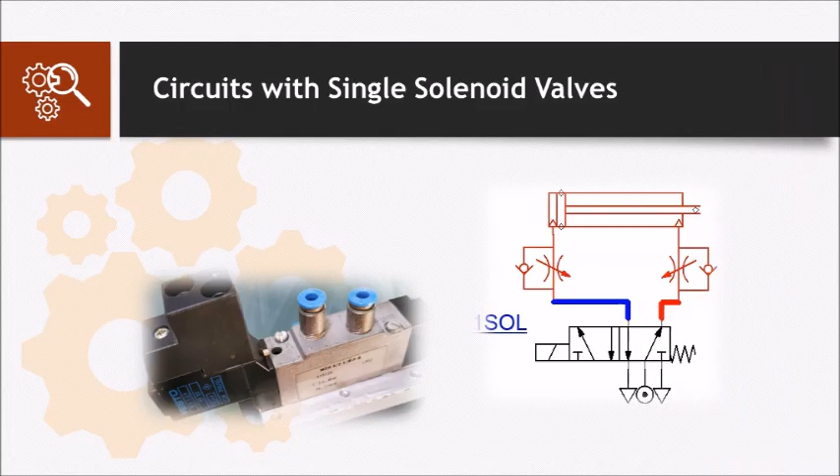Now we are at the last section of worksheet 4, whereby we will learn about circuits with single solenoid valve. As you can see, this is the directional control valve. It only has one solenoid, so this is a single solenoid valve.

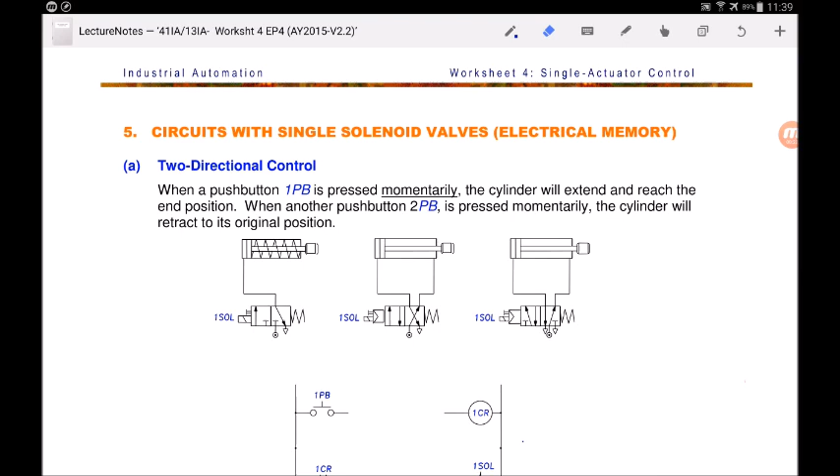We learned earlier that single solenoid valve have electrical memory, unlike a double solenoid valve which has pneumatic memory. So let's first go through what we mean by electrical memory. Electrical memory is actually a circuit using single solenoid spring return valve, and it needs to have its electrical signal stored there, hence it is said to have electrical memory.

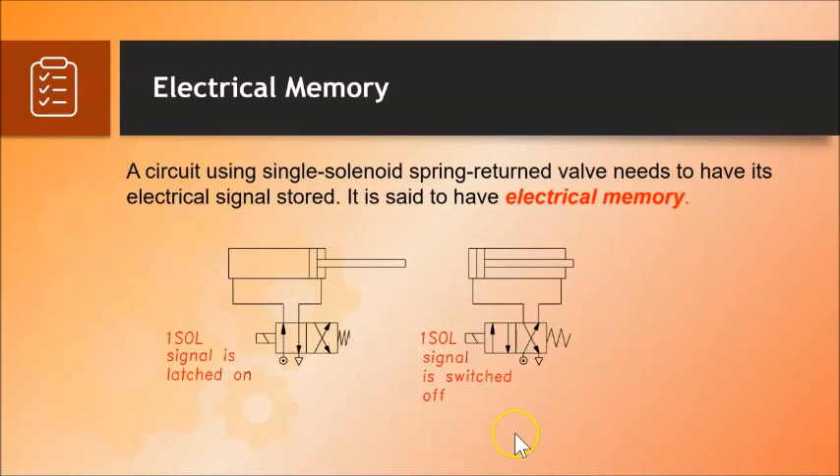What does it mean? Basically, in order to make this cylinder extend, I need to constantly energize this solenoid. The keyword here is constantly turn on this solenoid. The moment you switch off the signal at the first solenoid, it will go back to its spring position and make the cylinder retract, as you can trace the airflow path here. So single solenoid directional control valve is said to have electrical memory because it doesn't remember its last position. Hence, you need to constantly turn on the solenoid in order to make it extend in this example.

Now we shall take a look at single solenoid directional control valve and how it behaves. The default position of the single solenoid directional control valve is at this position, which is the spring position. At the spring position, the air supply will go through the directional control valve to the rod side of the cylinder, and come back to the exhaust. So when it's at spring position, cylinder will retract.

So if I want to make the cylinder extend, I need to energize solenoid 1 using this control circuit so that the valve will switch to this position to make the cylinder extend. Let's visualize this control circuit first.

When I press 1 PB, 1 CR will turn on, contact will close, the solenoid will be energized and the cylinder will start to extend. Let's watch this now.

So I press and hold 1 PB, 1 CR is on, contact is closed, solenoid is energized, the cylinder is extending because it's at this position. However, the moment I release 1 PB, can you see the valve immediately switch back to this position, which is the spring position, because there's no more power to the solenoid the moment I release 1 PB. As 1 CR coil is de-energized, contact will go back to open, solenoid is off. That's why it is retracting now.

Let's watch again. When I press 1 PB, solenoid is being energized. However, the moment I release 1 PB, cylinder immediately retracts back because it goes back to spring position as the solenoid is now de-energized. It's off.

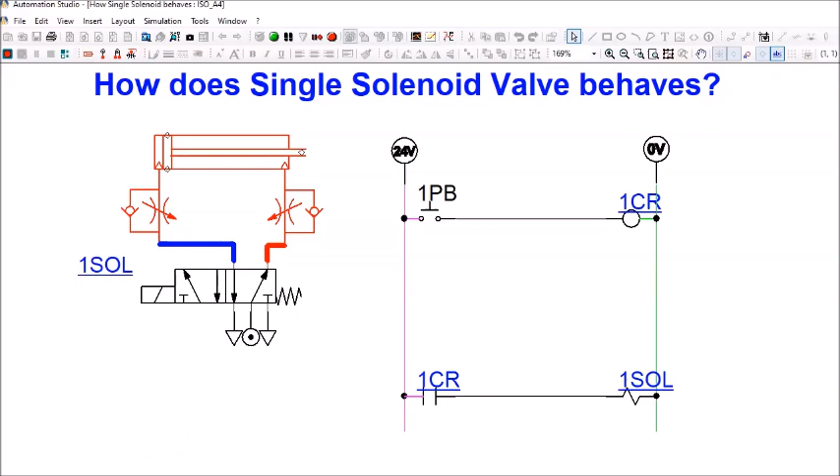So let's go back to the worksheet now to understand single solenoid directional control valve better and how we can design the circuit to control a single solenoid directional control valve efficiently.

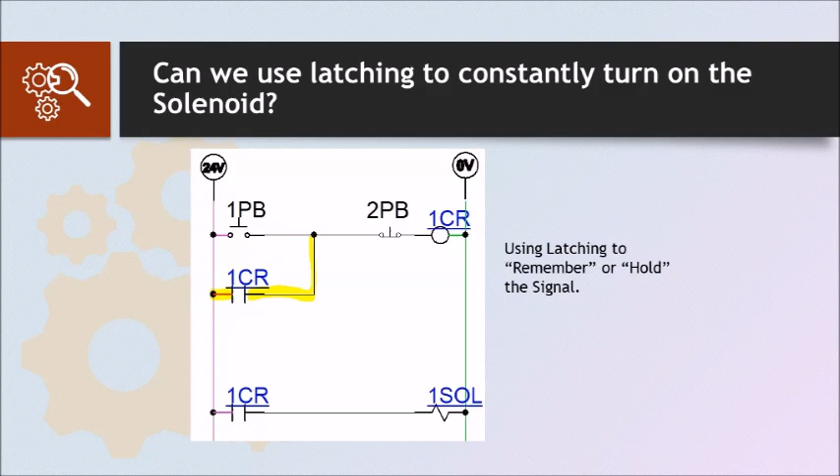Okay, as you can see earlier in the simulation diagram, if the single solenoid over here suddenly has no power, or is being de-energized, the directional control valve will immediately spring back to spring position, to make the cylinder retract. This is the key difference between a single solenoid directional control valve as compared to a double solenoid directional control valve, which have pneumatic memory.

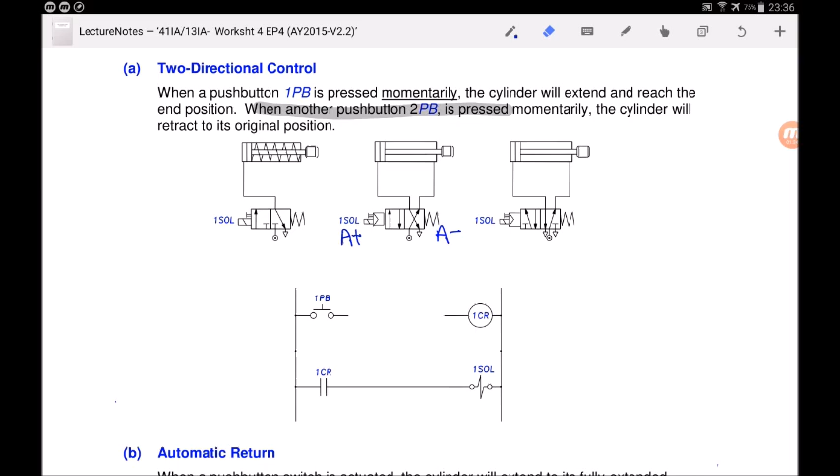So let's take a look at this question first. When push button 1 PB is being pressed momentarily, the cylinder will extend and reach the end position. When push button 2 PB is being pressed momentarily, the cylinder will retract to its original position. So let's write down the flow of this question first. When 1 PB is being pressed momentarily, this is the key word here, meaning you press and let go, the cylinder will extend and reach the end position, and stays there until you press 2 PB, then the cylinder will retract.

Just to recall again, earlier we mentioned that A means cylinder A, plus means extend. So over here there's only one cylinder, so I'm talking about A extend and A retract, cylinder A extend, cylinder A retract.

So now let's take a look at this electrical ladder diagram. First, we always look at the purpose of the control relay. As you can see over here, this 1CR control relay contact is here, and the contact of the 1CR is being used to control the solenoid. In other words, when the 1CR coil is being energized, the contact will close and the solenoid will turn on. What happens when the solenoid turns on?

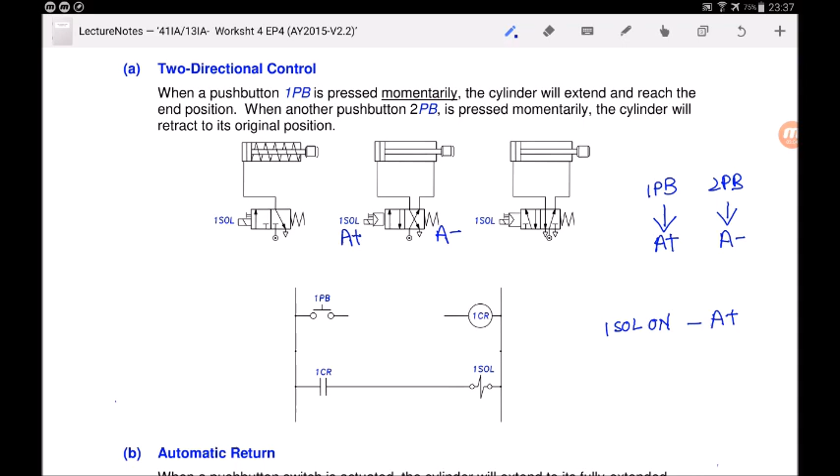As you can see over here, I already labeled the diagram. When the solenoid is energized, the cylinder will extend because the directional control valve is at this position. So it's good to write down all these to help you solve the question. I will just write here, when 1 SOL is on, the cylinder will extend. This is for my own notes, to help me solve the question. And when 1 SOL is off, you go to the spring position, the cylinder will then retract. So with this, I know that the purpose of 1CR is to make the cylinder extend and retract.

So how do you energize 1CR to turn the solenoid on? Can I just draw a straight line over here like what I have shown you earlier in the simulation circuit? The answer is no, because the question says when 1 PB is being pressed momentarily, meaning first you press, 1CR will turn on, correct? Contact will close, solenoid will be energized, the cylinder will start to extend, but the moment you let go of 1 PB, no more power to 1CR, the contact will stay open, the solenoid will be off, and the cylinder will immediately retract.

So we cannot make the cylinder extend properly. So how do we achieve continuous power to 1CR so as to close the contact over here to make the solenoid turn on when 1 PB is pressed? You have learned this before. All you need to do is create a latch. So let's look at the concept again. When you press 1 PB, the 1CR coil will turn on, the contact will close, both contacts will close, the solenoid will turn on, and because the contact over here closes, 1CR will turn on forever now, even if you let go of 1 PB.

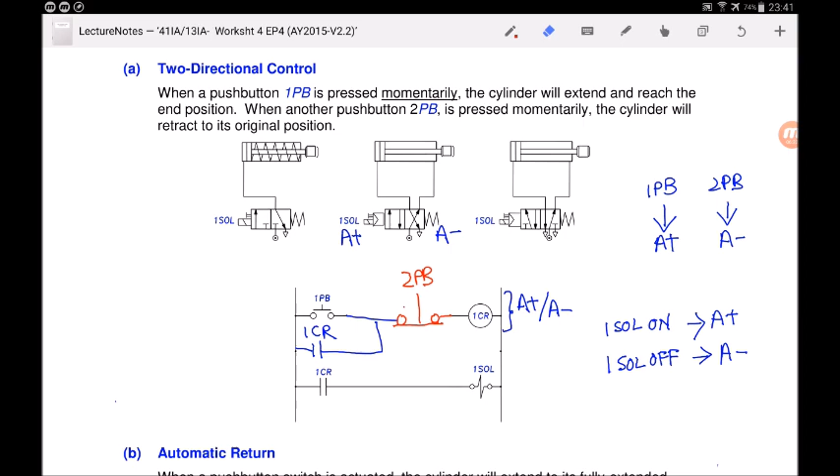Now we will look at the simulation circuit for this again. I'm going to show you how this control circuit is going to work for this single solenoid directional control valve. As you can see, the directional control valve is currently at retract position, which is at this spring position over here. So the moment I energize the solenoid, the cylinder will start to extend. We need to constantly turn on this solenoid in order to make the cylinder extend fully. So as I've explained earlier in the worksheet, we need the solenoid to be constantly powered on, and to achieve that we just need to draw a latching circuit.

So let's visualize how this latching circuit is going to work. I'm going to press 1 PB momentarily, and you can see that the control relay coil will be energized. The contact will change to close. 1 PB is pressed and let go. You can see 1 CR is turned on and is constantly powered on by the latching circuit, and the contact will close because the coil is energized. The cylinder will extend because solenoid is on. You can see that as long as you constantly power on the solenoid, the directional control valve will stay at this position and the cylinder will stay fully extended there. Because solenoid is energized, and is still being energized, the valve position is at the solenoid position, hence the cylinder stays this way.

How am I going to make this cylinder retract? The only way to make the cylinder retract is to de-energize the solenoid. That means you turn off the solenoid power and the directional control valve will go back to this spring position to make the cylinder retract. So let's watch this. When I press 2 PB, I'm going to break the circuit, which means that 1 CR will be off. When the coil of 1 CR is off, the contact will go back to open position and solenoid will be off as well. Hence, it goes back to spring position. When I press 2 PB momentarily, 1 CR is off, contact all open, solenoid is off. You can see that the cylinder starts to retract back to the retracted position.

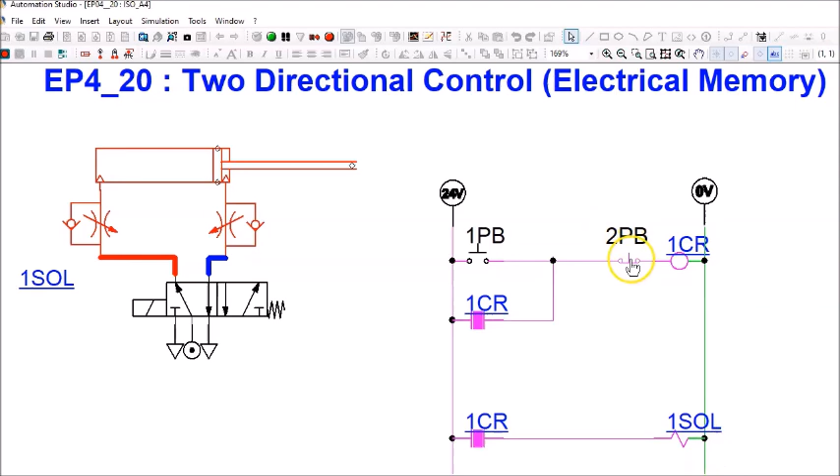So let's watch this simulation again. When I press 1 PB momentarily, solenoid is being energized, cylinder will start to extend. And once it reaches fully extended position, it will stay there, because the cylinder is fully extended and because the solenoid is still energized, it will stay in this valve position. So I'm going to break the circuit, which means that I'm going to turn off the solenoid. I'm going to press 2 PB momentarily. 1 CR is off, the contact will go back to open, the solenoid will be off, the cylinder will start to retract because it is back to the spring position, as the solenoid is off.

Okay, so now let's go back to the worksheet.

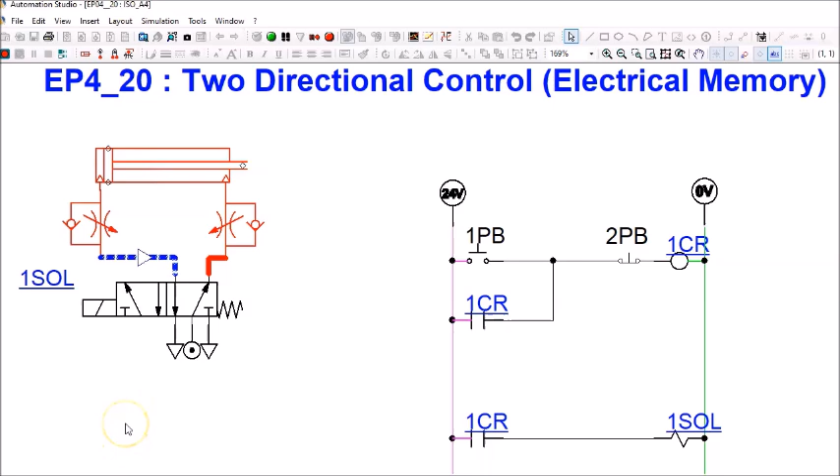Now we are back to the worksheet and we shall look at the automatic return circuit. You can see over here there are two pneumatic drive circuits. This is a single acting cylinder, this is a double acting cylinder because of 2 air ports, single acting cylinder because of only 1 air port. This one is using a 3/2-way normally closed single solenoid directional control valve. This one is using a 4/2-way single solenoid directional control valve. As you can see, both are using single solenoid directional control valve, so the control method will be identical. So what did the question want us to do? It says that when a push button is actuated, the cylinder will extend to its fully extended position and then retract automatically.

Okay, so there will only be one push button in this circuit. How do we know that the cylinder will extend to its fully extended position? The cylinder has no eyes, so how does it know that it has reached there?

Well, you can introduce a limit switch over here, which I'm drawing now, so that when the cylinder is fully extended, you will activate this limit switch to close it or open it, depending on the question. This question is the same: when the cylinder is fully extended, you will activate the limit switch.

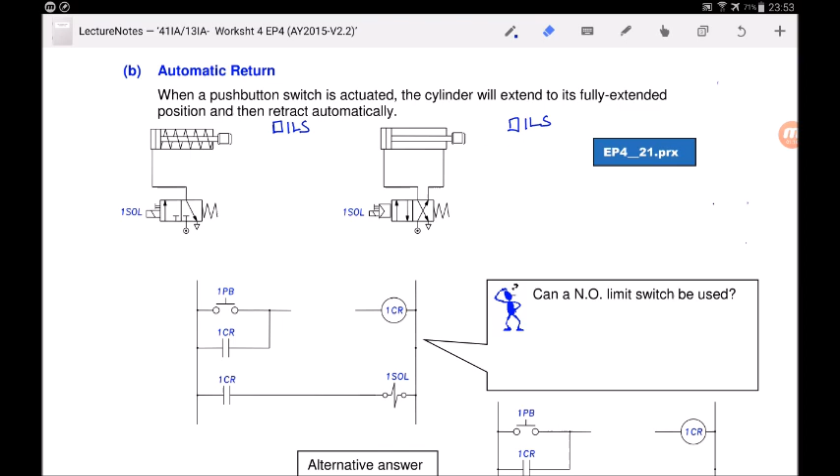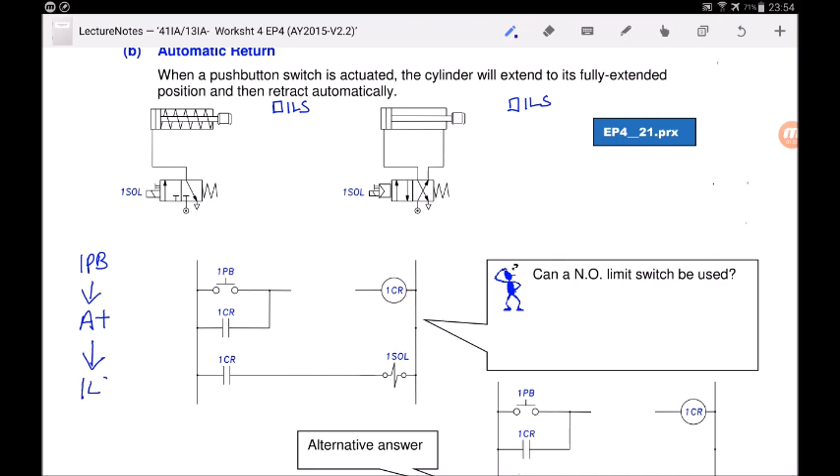So how are we going to draw the control circuit over here? Let's take a look. First, we draw the flow of the diagram. When 1 PB is actuated, the cylinder will extend. And how do I know it reached its fully extended position? 1LS, and then it will retract.

With this, let's look at this circuit diagram first. First we must find out the purpose of 1CR. As you can see, 1CR is used to control the solenoid, so the purpose is to make the cylinder extend and retract.

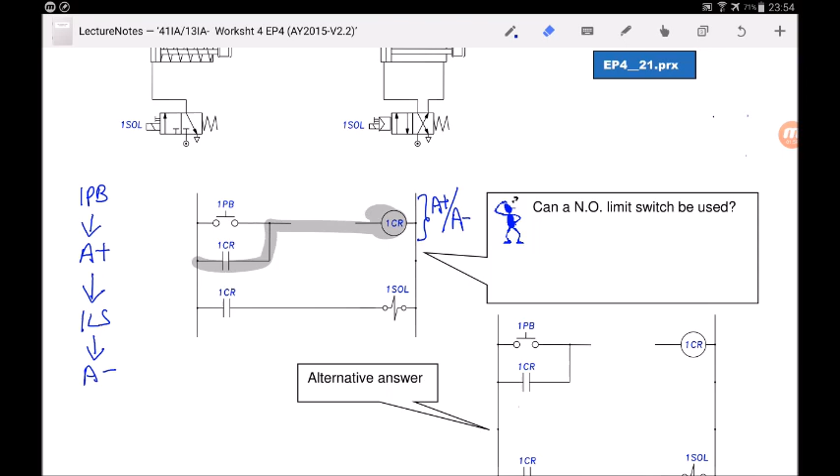So how do you make the cylinder extend? Well, when you press 1 PB, 1CR will turn on, and this latch will continuously power on the control relay, correct? And the solenoid will be energized and the cylinder will extend.

So when do you want to turn off the power to 1CR so that the solenoid will have no more power and the cylinder will retract? Well, I just need to draw the limit switch here. So take a look at this limit switch now first.

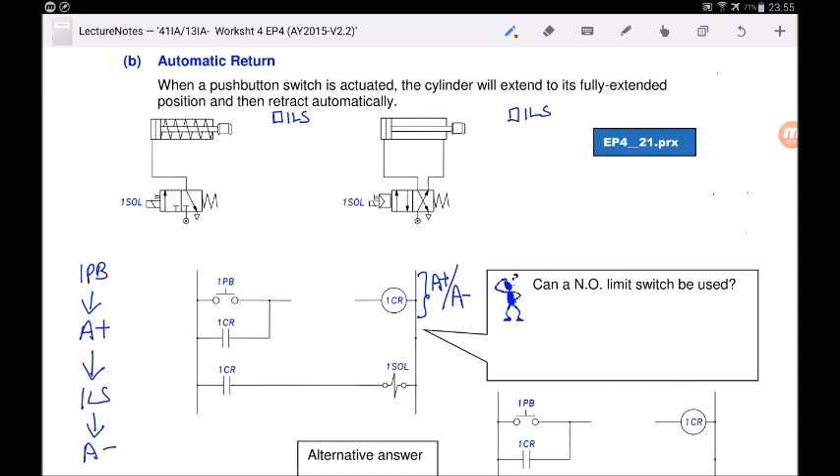Is this limit switch activated in the initial diagram? No, it's not. So I can either draw normally open or normally close. There are two answers I can draw: normally open or normally close. So which one should I put in here?

Let's try the normally open first. Do you think this will work? No, it will not work.

Why? When you press 1 PB, you can't even turn on 1CR because your limit switch is normally open, and it will not be activated until your cylinder is fully extended. But because you are not providing any power to your solenoid, your cylinder will never extend. So this is wrong.

So I need to draw normally close. Okay, let's take a look. When you press 1 PB, and because the limit switch is normally closed at the start, 1CR will turn on, the solenoid will be on because the contact will close, and the cylinder will extend.

However, when the cylinder is fully extended, 1LS normally closed will become held open. It will break the circuit, 1CR will be off, the 1CR contact will go back to its original position, which is normally open, the solenoid will be off, and the cylinder will immediately retract. So this is how we do this question.

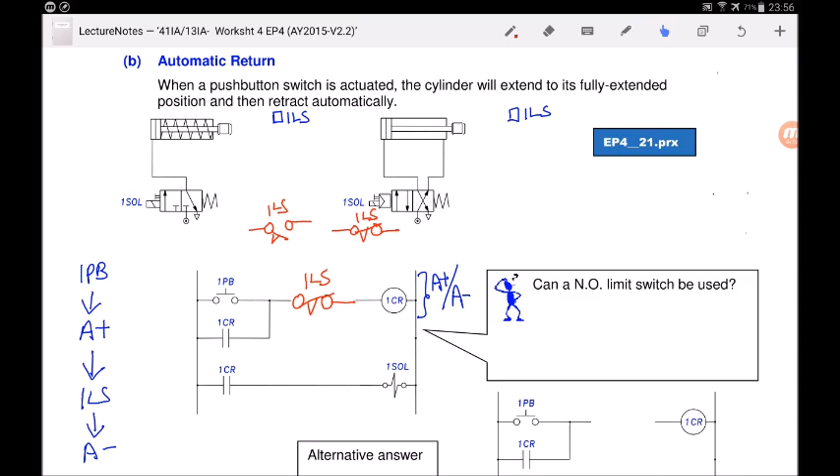Next, the question asks, can we use a normally open limit switch? Well, I know that I cannot use it directly in here, which I explained to you just now. But can I think of a way just to use this normally open limit switch?

Yes, I can. So to use this normally open limit switch, I cannot draw it here, because if I press 1 PB, your 1CR will never turn on, your solenoid will never be on, your cylinder will never extend. If it never extends, the circuit already failed, because when you press 1 PB, the cylinder must extend.

So if I cannot draw it here, I have to draw it as an input, which is on the left, right? So I draw 1LS normally open here first, because the question asked me to use it. I have to think of a way to use it. And I may want to create a control relay.

So I'll create another control relay, I call it 2CR. The purpose of 2CR is to know that the cylinder is fully extended, no, that the cylinder is fully extended.

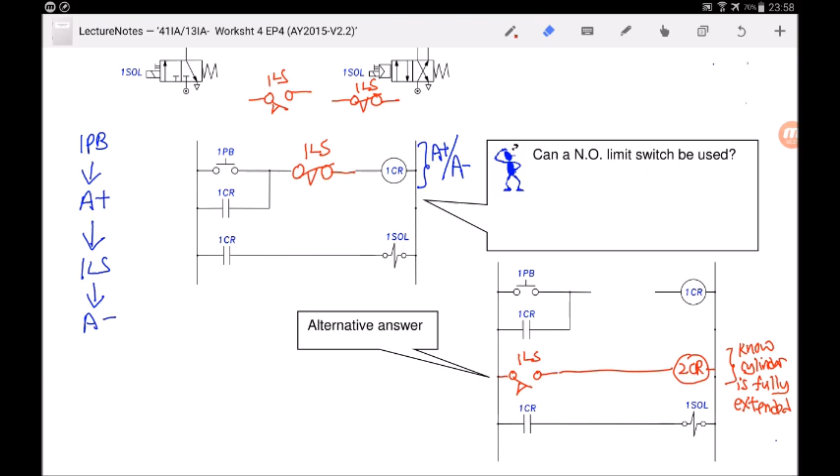Let's think about this first. Look at the circuit on top here. First this pneumatic drive circuit, or this circuit also can. If your limit switch is at its original position, it is normally open, which I draw over here, right? Normally open.

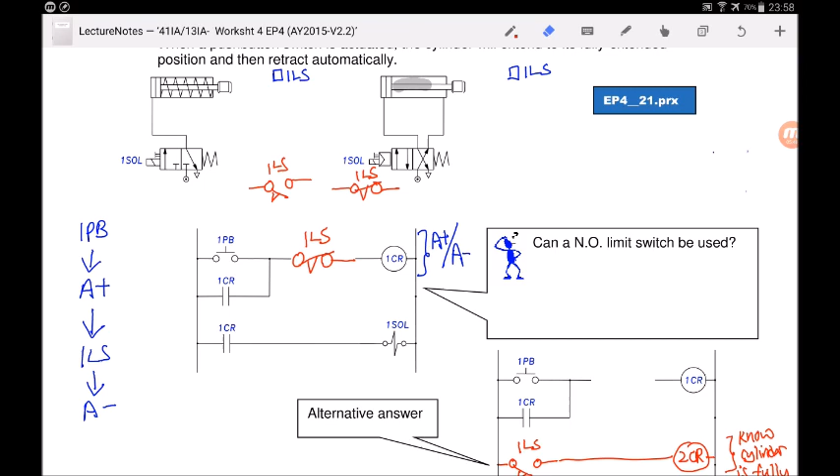When will a limit switch be activated? When your cylinder is fully extended, you will activate this limit switch, which makes it normally open held close. 2CR will turn on, and you know that your cylinder is now fully extended. Can I make use of the contact of 2CR to insert in here?

Okay, so there are two types of contact for control relay. It's either normally open or normally closed. Okay, so let's try the normally closed this time, and let's see whether I will get the answer.

Okay, so you can see that I choose normally closed because I want to allow current to pass through. When you press 1 PB, current can go through, 1 CR will turn on, solenoid will be energized, and your cylinder will extend. Your cylinder will slowly extend until you reach 1 LS.

It will become normally open, held closed. 2 CR will turn on because now you know that 2 CR turning on means your cylinder is fully extended. When 2 CR turns on, the normally closed contact becomes open, right? It will change, and no more power to the 1 CR coil.

Contact will become open again. No more power to solenoid. The cylinder will immediately retract.

Okay, so you can see there are two answers to this question. This is solution 1 over here. Solution 1 is here, and this is solution 2. And to complete this, I also want to label what's the purpose of 1 CR, which is to energize the solenoid to make the cylinder extend and retract.

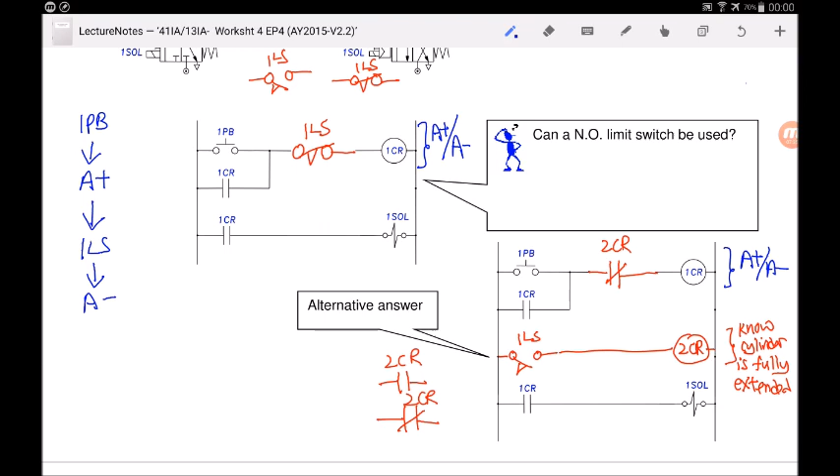With this, let's take a look at the simulation circuit to understand this better. We will now take a look at this simulation circuit where this cylinder, once it reaches the fully extended position, will then automatically return back to the retracted position. So how are we going to design a control circuit to achieve that?

Well, let's take a look at this circuit, which I have explained to you earlier in the worksheet. So this 1LS again is not activated. We are using a normally closed 1LS in this scenario first. So as you can visualize, when 1 PB is pressed, the solenoid will be energized, the cylinder will start to extend because the valve is at this position.

And when it reaches 1 LS, it will activate the switch, and this normally closed will become held open, and it will immediately break this circuit, which means that 1 CR will be off, and the solenoid will be de-energized, which means off as well. So the cylinder will go back to retracted position because the directional control valve will be at this spring position.

So let's watch this. When I press 1 PB momentarily, you can see that the solenoid will be energized. The cylinder will slowly extend, and once it is fully extended, it will activate 1 LS. Look at this, normally closed, held open, breaks the circuit, and the solenoid will be off.

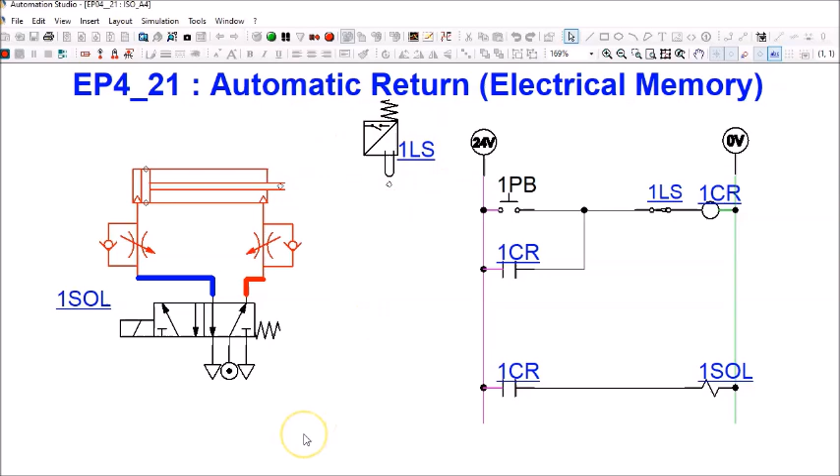Okay, let's watch the next simulation circuit. Now we'll take a look at this control circuit where we are using this normally open limit switch with an additional control relay, coil and contact.

Okay, so when I press 1 PB, the cylinder will extend because the solenoid will be energized. When it reaches the fully extended position at 1 LS, you can see that it will become normally open, held closed because it's activated.

Hence, 2CR coil will be energized, the contact will change to open, which means no more power to 1CR, which in turn means your 1 SOL will be off and your cylinder will go back to retracted position because the directional control valve will be back to spring position whenever the solenoid is off.

Okay, so let's watch this. When I press 1 PB momentarily, 1CR coil is energized because of this latching circuit, and you can see the solenoid is on. The moment the cylinder reaches fully extended position at 1 LS, it will become normally open, held, close. 2CR coil will be energized, contact will open, and you can see 1CR is off now.

Solenoid is off, the cylinder will start to retract. The moment you leave 1 LS, it goes back to open position, which means 2CR coil is not energized anymore. That's why the contact will go back to close. Hence, if I press 1 PB again, the cylinder will extend.

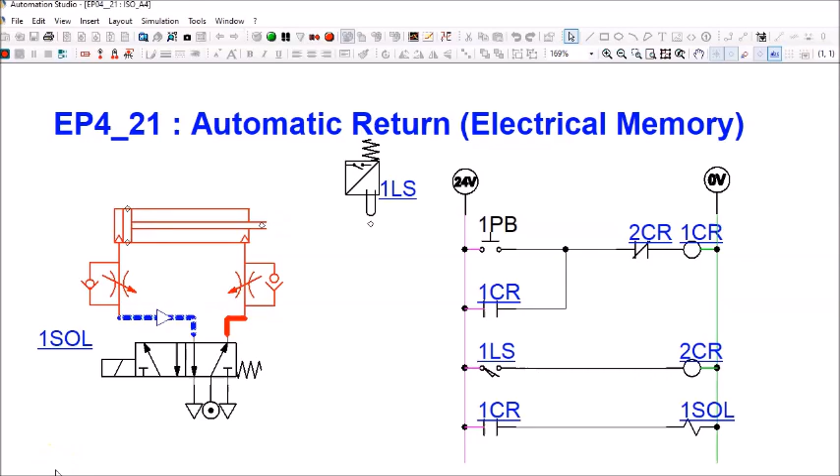We are now back to the worksheet again, and we will take a look at the third circuit for single solenoid directional control valve, which is the time delay control. So when push button 1 PB is activated, the cylinder will extend. Upon reaching its fully extended position at 1 LS, the cylinder will remain there for a few seconds before retracting to its initial position.

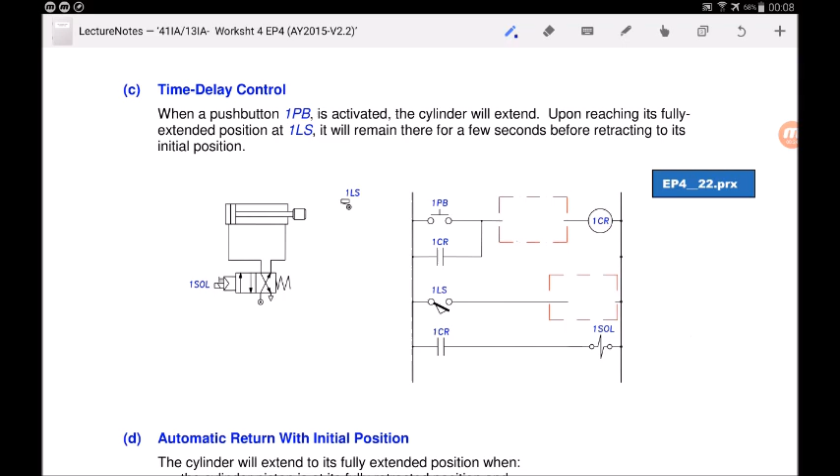Okay, so let's write down the flow of this question first. When 1 PB is activated, the cylinder will extend. Upon reaching its fully extended position at 1 LS, it will remain there for a few seconds - let's give it 5 seconds - before it retracts to its initial position. So retract is A minus, correct?

So as you can see, this question involves a timer because there's a timing here, so I will need a timer relay, right? So first, let's take a look at this control circuit.

Okay, write down the purpose of 1CR first. The purpose of 1CR is to control the solenoid, which means that you are making the cylinder extend and retract. As you can see, this directional control valve, when it's at spring position, which is at this check box, the cylinder will retract because it's entering from the rod side.

And likewise, this will extend when you energize the single solenoid here. The check box will be in this position, the cylinder will extend. So, the purpose of 1CR is to make the cylinder extend and retract.

So when I press 1 PB, 1CR will turn on and the latch will ensure that you have continuous power to the control relay coil. The contact will close, the solenoid will be powered on, the cylinder will extend.

So let's take a look at this control chain here. So when I press 1 PB, cylinder will extend, which we already achieved in the circuit. Now, let's take a look. When the cylinder extends and reaches fully extended position at 1 LS, it will wait there for 5 seconds. So can I say that I would like to start my timer only when it is at 1 LS?

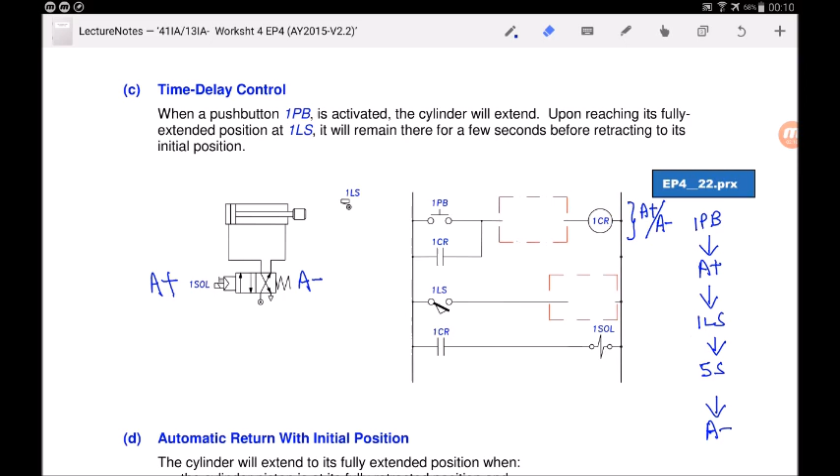Yes, okay, so we should draw the timer as a timer relay coil, in this case 5 seconds, and the contact normally open and normally close, and label please. So what should we draw over here? We should energize the coil, right? So when 1 LS is activated, normally open, held, close, you must activate the timer relay coil. So over here, I will draw the timer relay coil, and please write the preset time, 5 seconds, okay?

Okay, so 5 seconds later, you want to turn off the power to 1CR so that it will go back to normally open position and no more power to solenoid, so the cylinder will retract. So in order to turn off the power, I need to look at 1CR coil, right? So what should I put here? It's either normally open or normally close. The answer is pretty obvious. I will put normally close.

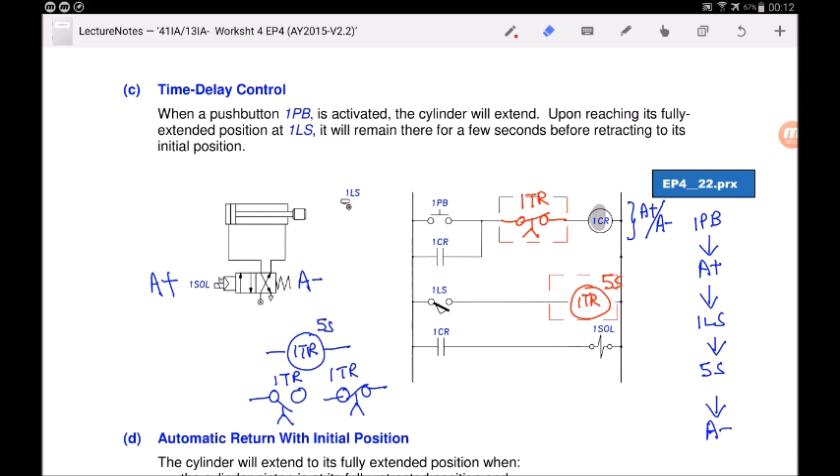Okay, let's visualize again. When you press 1PB, because your 1TR contact is normally closed, control relay coil will be energized, contact will close, the latch will close, and then solenoid will be energized forever until your cylinder reaches fully extended position at 1LS. This thing here will become normally open, held close.

You will then try to power on this timer relay coil. 5 seconds later, this timer contact will open. The moment it opens, you break the circuit and no more power to the control relay coil. The contact will become open again, and the solenoid will have no more power. The cylinder will then retract.

So as you can see over here, the flow, we have already achieved what we want, which is limit switch to turn on the timer relay coil. After that, 5 seconds later, you break the circuit which controls the cylinder extension retraction, which in this case is 1CR. That's why we put normally closed 1TR over here, so that 5 seconds later you open and the circuit will break. 1CR has no more power, so now it will be off because this contact goes back to its original normally open position. So this is how this circuit works.

So now, let's take a look at the simulation circuit for better understanding.

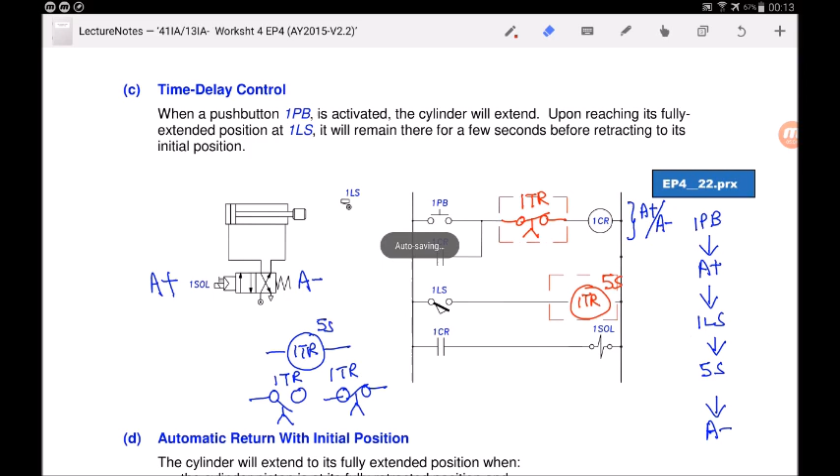Now we are looking at the simulation circuit for time delay control. So basically, when I press 1PB, 1CR will be energized, solenoid will be energized because the contact closed. The cylinder extends as the directional control valve is at this position.

And when the cylinder is at the fully extended position at 1LS, 1LS will become activated, it will become normally open, held closed. Timer relay coil will then be activated, because normally open, held closed allows current to flow through, so the coil will be energized. 5 seconds later, this normally closed contact will open, and hence the moment it opens, 1CR will have no more power.

When 1CR has no more power, it also means that your solenoid has no more power because the 1CR contact is controlling the solenoid. So the cylinder will start to retract. So let's watch this simulation circuit now.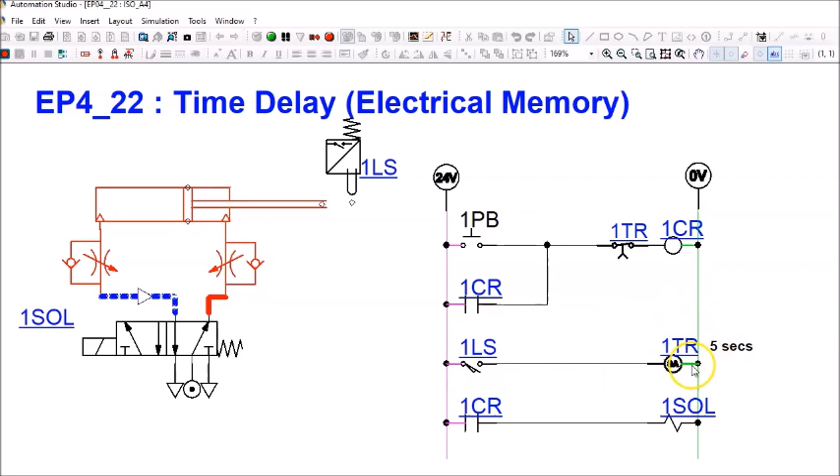And you can see that once the timer relay coil is off, timer contact will force back to original position. Same as the 1LS, the moment the cylinder piston is no longer touching it, it will become normally open again because it's not activated now. So that's the end of the simulation for time delay control.

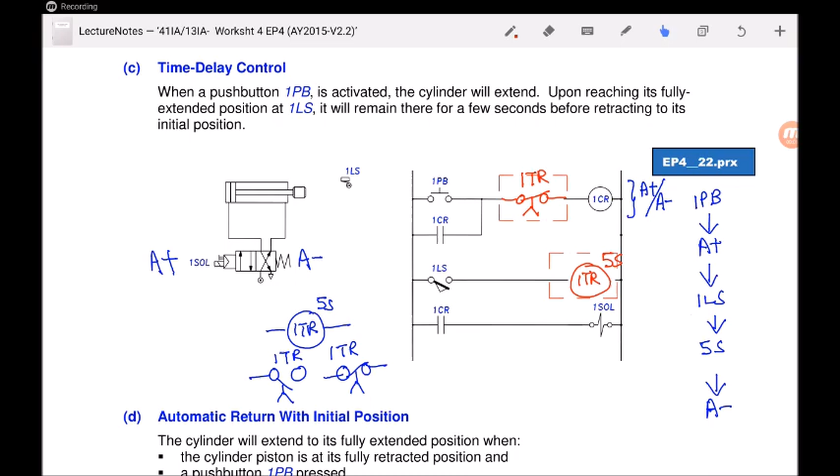We are now back at the worksheet again, and this time round we will take a look at automatic return with initial position. So the cylinder will extend to its fully extended position when two conditions are met: the cylinder piston is at its fully retracted position and a push button is being pressed. So let's write the flow first.

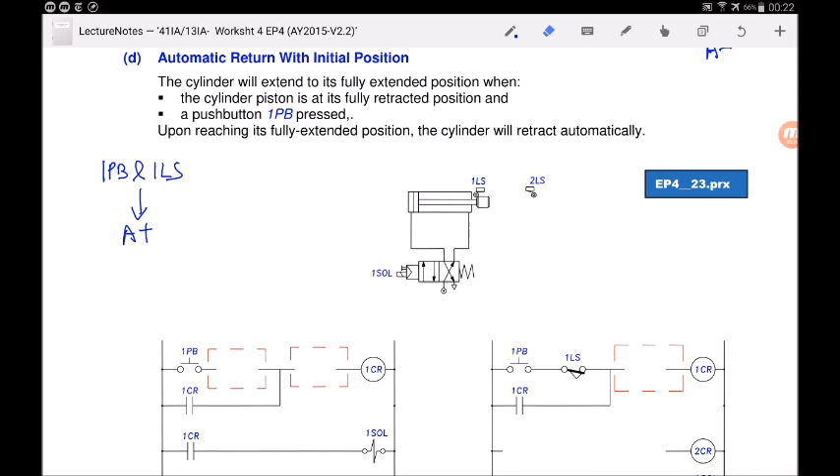So when 1PB is being pressed and the cylinder is at fully retracted position, which is 1LS, as I can see from this pneumatic drive circuit, fully retracted position, the cylinder will extend. Then it says, upon reaching its fully extended position, the cylinder will retract automatically. So, upon reaching its fully extended position at 2LS, the cylinder will retract automatically. So this is what the circuit wants.

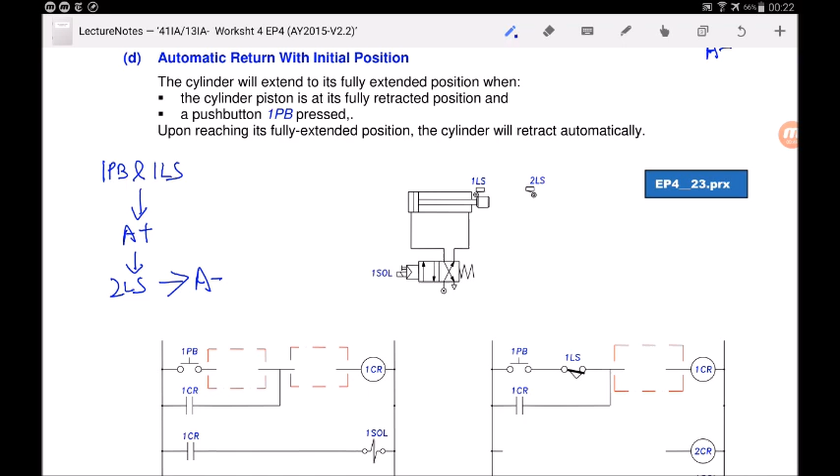So how do we do this question? Basically, there are two different solutions. In fact, in IA, we can have many different solutions as long as your answer and logic is correct. Okay, let's take a look.

First, look at this pneumatic drive circuit here. I can see that limit switch 1 is at activated position. So 1LS, when it's activated, it can be normally open, held closed, or normally closed, held open. We can take note of that first: 1LS can either be normally open, held closed, or normally closed, held open.

Because it's activated position. And for 2LS, it is not activated, so it's either normally open or normally closed. So we can see 1LS is normally open, held close, or normally closed, held open, because it's already activated by the cylinder piston. 2LS is not activated, so it's either normally open or normally closed.

So take a look at the first circuit over here first. Ask yourself, what's the purpose of 1CR? Again, I can see the contact is driving the solenoid. So obviously, it is making the cylinder extend or retract. So things on the left is actually turning on 1CR, do you agree? And things in the center will actually break the circuit, which means it turns off 1CR.

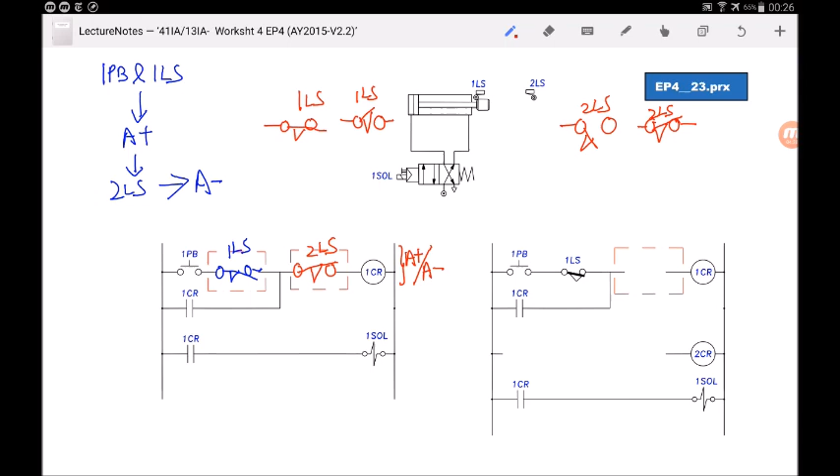So this is how this circuit works. Alright, this is solution 1. Okay, I write here solution 1. Now we'll take a look at solution 2.

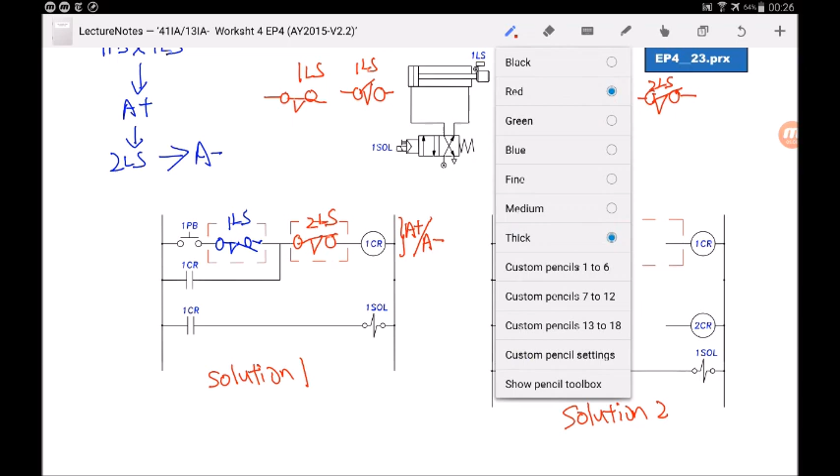Again, first label, what is the purpose of 1CR? You can see the contact of 1CR is being used to energize the solenoid. So the purpose of 1CR is to make cylinder extend and retract, because by energizing the solenoid, actually you are making it extend, correct? As you can see from this directional control valve here, one solenoid when it's being energized, you'll switch to these spots. When it's off, it goes back to spring position and the cylinder will retract.

So now this solution 2 introduces another control relay called 2CR. So what should I put here to make it retract? As you can see, definitely the answer needs to come from 2LS because only 2LS will make cylinder retract. But I couldn't draw a normally open 2LS here. Can I draw it here?

Okay, let's visualize again. So when your cylinder has reached fully extended position, 2LS will become activated, normally open, held close. It will activate 2CR. The purpose of 2CR is to make it retract, correct?

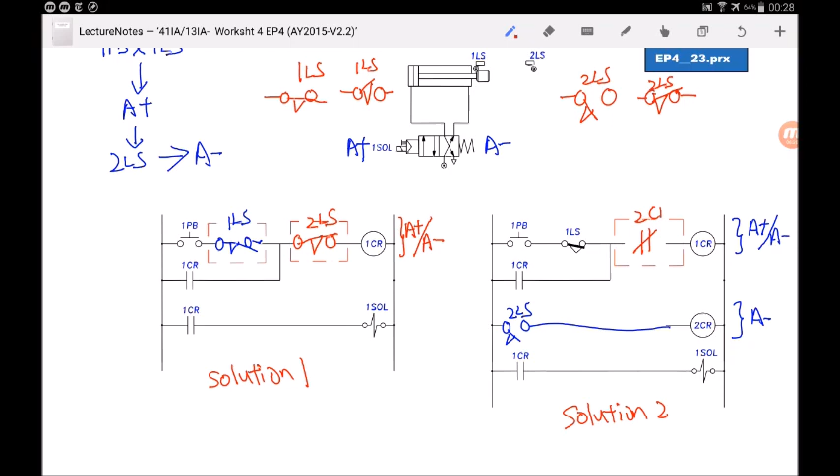Because I will cut off the power. So how do I cut off the power? A simple way is to do this: I will draw the 2CR normally closed here, just like what I've done in example part B. This is actually similar to this, as you can see over here.

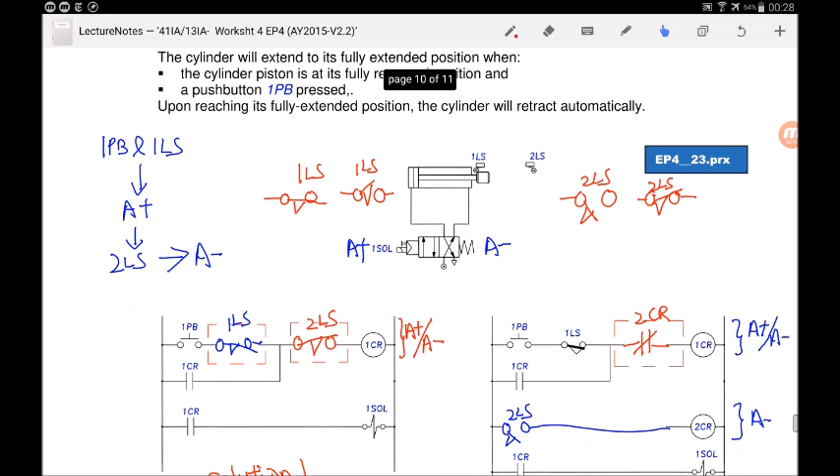So let me go back to the example now. Let's recall how this circuit works again. When you press 1PB, and because your 1LS is at normally open, held closed position, and 2CR is normally closed, so 1CR will be energized, contact will close, solenoid will be activated, and it will stay activated because of this latch. When your 1CR coil is being energized, your contact will close, so solenoid will keep on energized, cylinder will extend.

When it has reached 2LS, normally open will become closed, and you will energize 2CR. So when you energize 2CR, the contact will change. It will change to open, ending up breaking the circuit. 1CR has no more power. When 1CR has no more power, the contact will become open, and no more power to the solenoid.

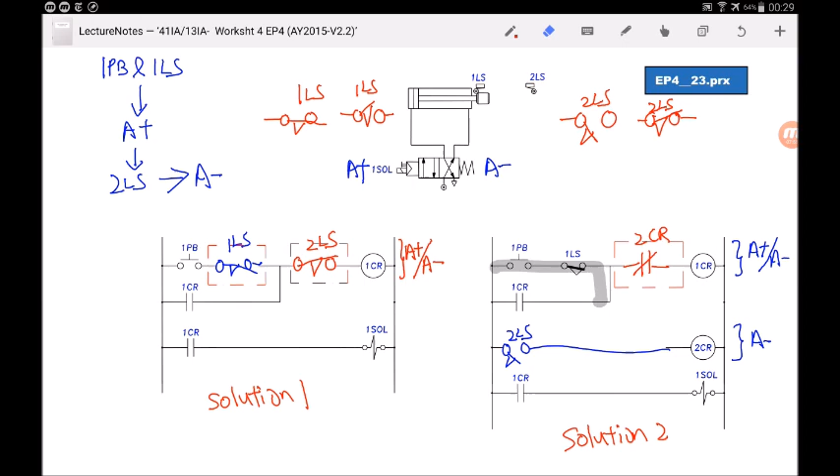The cylinder retracts. So to summarize, things on the left is like the start condition, things within this latch here is the start condition, and things that are out of this latch here is actually the stop condition, or I call it the on and off. Basically I'm turning on the solenoid using the condition here, I turn off the solenoid using the condition in the center.

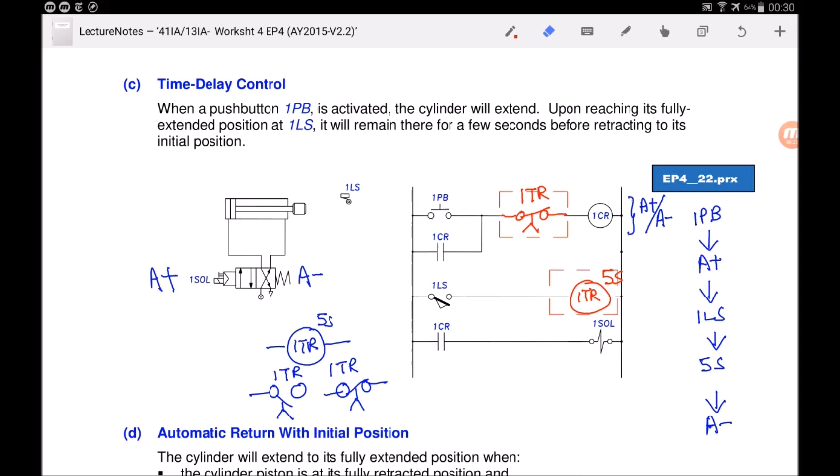As you can see, when you press 1PB, solenoid will turn on. So things that is on is actually within this latch, things that is off is outside. 5 seconds later you turn off and the solenoid will retract, right? So you can see there's a specific pattern to it.

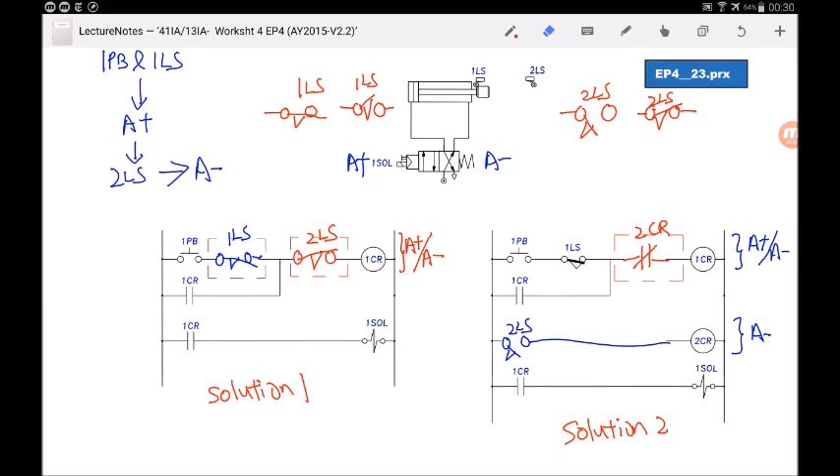Now we will take a look at the simulation circuit for solution 1 and solution 2 so that you can visualize and understand better. In this simulation circuit, we will show you that when I press 1PB, the cylinder will extend and retract automatically with the help of the limit switches.

As we can see over here at this pneumatic drive circuit, 1LS is currently activated now, and you can see from the control circuit it is currently normally open, held closed. And you can look at 2LS now. 2LS is not activated. We can choose to use normally open or normally closed, but in my simulation circuit here, I will illustrate to you how I can use normally closed 2LS to do the control circuit, which you can see over here, 2LS is now normally closed.

So when I press 1PB momentarily, you can see that 1CR coil will be energized, the contact will close. This is the latching circuit, and the solenoid will be energized. Hence, the cylinder is extending because the valve is at this position.

But when the cylinder is at fully extended position, you can see 2LS is now normally closed, held open because it's activated now. And the solenoid is now off because just now when it opens, you actually cut off the power to 1CR. 2LS has fallen back to normally closed position because it is no longer at its extended position.

As you can see, 1LS is now back to normally open, held closed because it's now activated. So let's watch this circuit again. When the cylinder is fully retracted, 1LS becomes normally open, held closed. When I press 1PB momentarily, 1CR is now energized, contact closed, solenoid is now on.

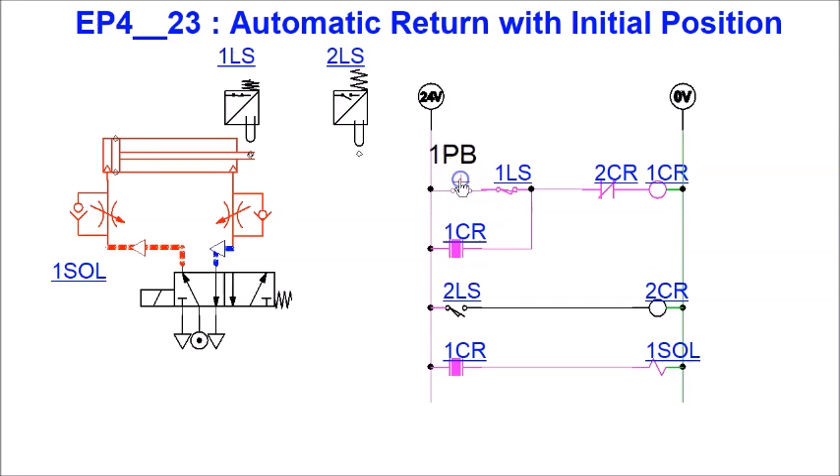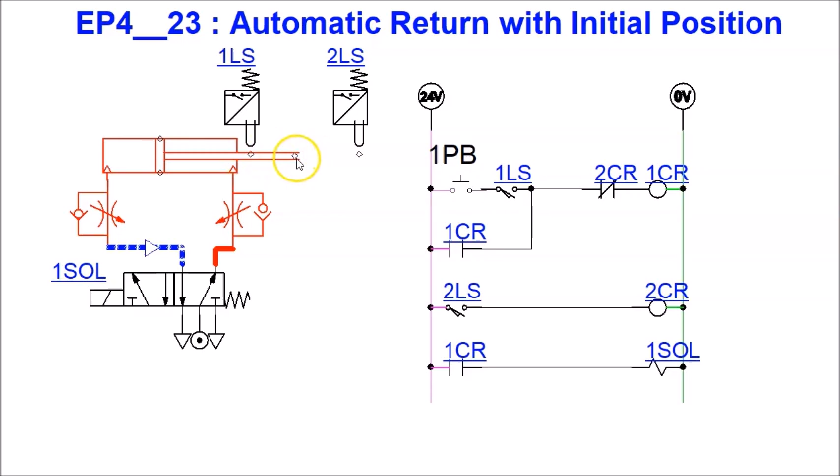Let's press again. So you can see that the solenoid is now being energized because 1CR is on. And when 2LS is activated, 2CR will turn on, contact will open, 1CR will be off. And because the cylinder has not reached its fully retracted position, you can see that 1LS is now open. So even if I press 1PB at this point of time, the cylinder will not extend back, because 1LS is still open, until it is at its fully retracted position.

So with this, we'll go back to the worksheet.

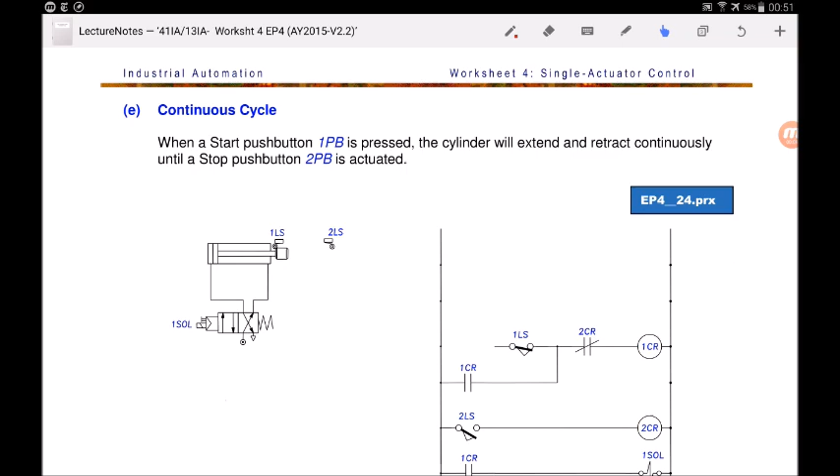Now we shall take a look at the last example, continuous cycle, on the worksheet using a single solenoid directional control valve. Let's draw the flow of this question first. When 1PB is pressed, the cylinder will extend and retract continuously until a stop PB is actuated. So when 1PB is pressed, the cylinder will extend.

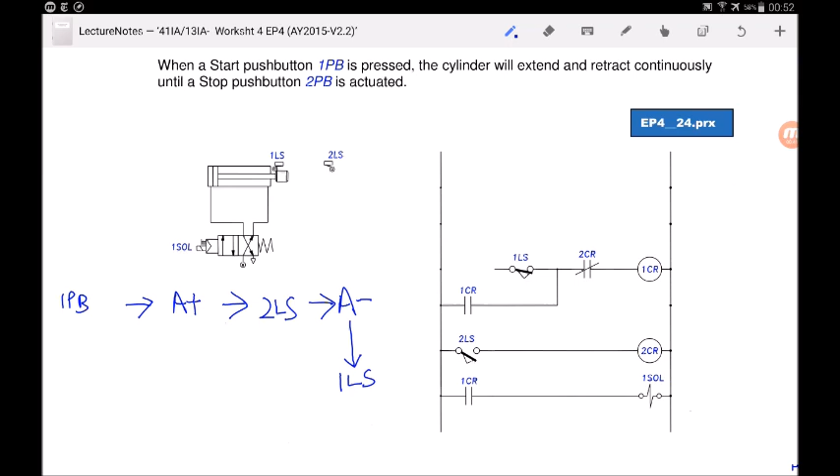And how do you know it's fully extended? You reach 2LS, then it will retract. Then it will reach 1LS. Then after that, it will just go on and on continuously, without the need to reactivate pressing 1PB again. So you only just need to press 1PB once momentarily.

So now let's take a look at this electrical ladder diagram first and write down the purpose of 1CR and 2CR. The purpose of 1CR is to control the solenoid, so to control the solenoid we are actually making the cylinder extend and retract.

As I can see from this diagram, when I energize the 1SOL, the cylinder will extend. When it's at spring position, the cylinder will retract, as you can see over here.

So next, what's the purpose of 2CR? I look at the contact of 2CR here. I can see that when 2CR coil is being energized, the contact will change to normally closed held open, breaking the circuit.

So when you break the circuit, which means no more power to 1CR, you are actually turning off the solenoid, which makes the cylinder retract. As you can see from the contact, when 2CR coil is energized, the contact becomes normally closed held open, and hence no more power to 1CR, and 1SOL will not be energized. Hence 2CR is used to make the cylinder retract.

So as I said earlier, there's a pattern to every latching circuit. Things above the latch are the on condition or start condition. In this case, when you turn on 1CR, you make the cylinder extend. So the conditions to make the cylinder extend, I'll put it here. The conditions to make the cylinder retract, I'll put it here, which is the 2LS controlling it, right? That's why we draw 2CR normally closed here.

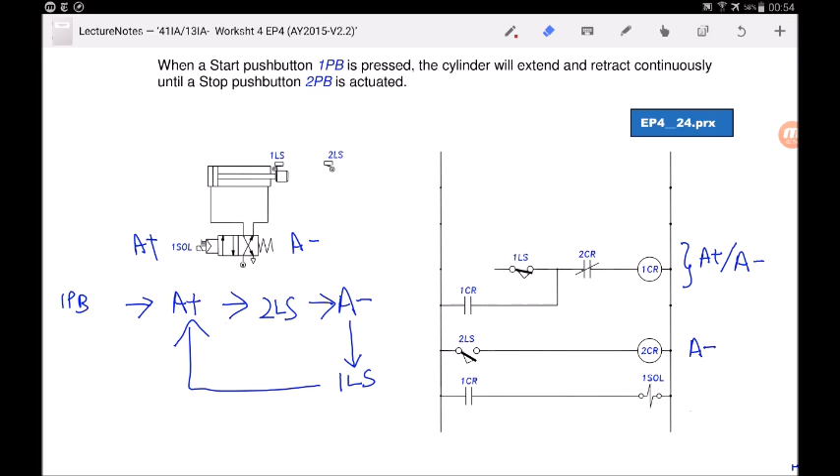Most students will say this, as you look at this flow diagram, the conditions to turn on 1CR, or to make the cylinder extend, is first 1LS, which they redraw, and 1PB, which is what most students will say. Let's draw first.

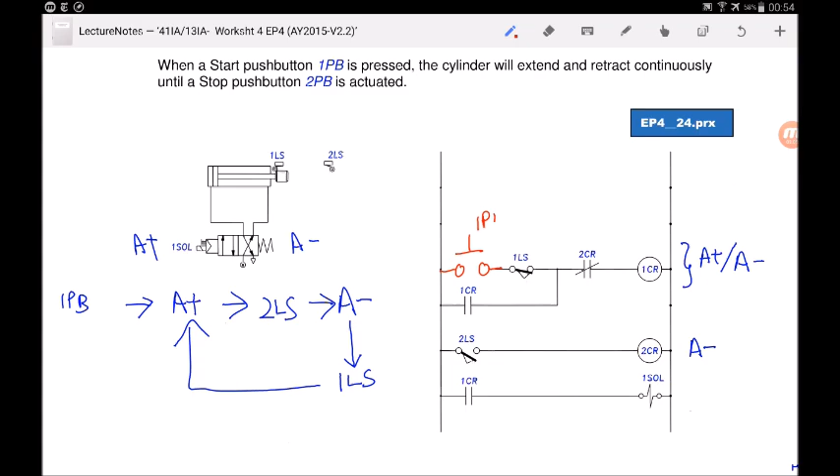Remember, the flow I'm drawing over here is meant to help us. You can write your own flow diagram to help you fill in the electrical ladder diagram. So is this answer correct?

Well, let's think through this. When you press 1PB, and because 1LS is normally open held closed, 2CR is still closed at the moment, 1CR will turn on, solenoid will be energized, the cylinder will extend. So yes, the cylinder will really extend.

Once it reaches fully extended position at 2LS, 2CR will turn on, the 2CR contact will change to open, because the coil is energized, the contact will change from normally closed to normally closed held open. 1CR will have no more power, the contact will be open, no more power to the solenoid, and the cylinder will retract. So yes, when you reach 2LS, the cylinder will retract.

So when the cylinder retracts and becomes fully retracted, it will reach 1LS. When it reaches 1LS, 1LS will become normally open held closed. And in order to turn on the cylinder again, I need to energize the 1CR coil, the contact will close, and then the solenoid will turn on to make the cylinder extend. But that's provided I press 1PB again.

But are we allowed to press 1PB again? No, because the question says when the start 1PB is pressed, the cylinder will extend and retract continuously until a stop 2PB is actuated.

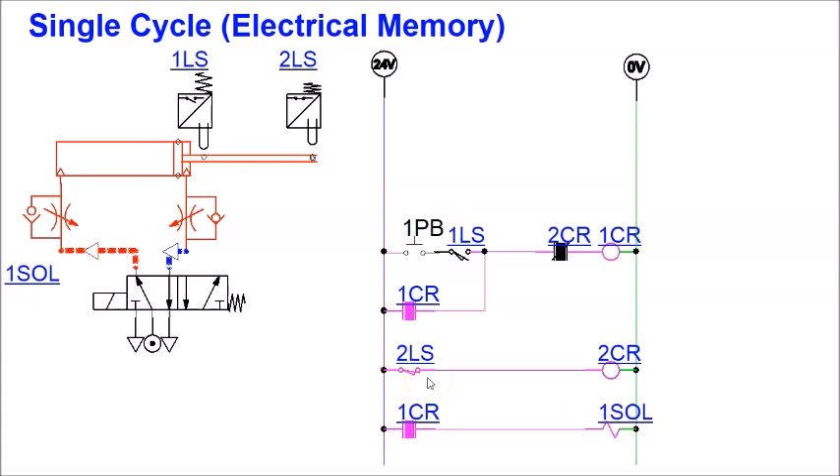Take a look at 1LS - it goes back to normally open held closed the moment it is activated. So only by pressing 1PB again will the cylinder extend. This latch is important because it maintains continuous power to 1CR, which in turn energizes 1SOL. So 2LS is going to close, normally open held closed, because it's at extended position, and that's why the circuit breaks, because 2CR is energized just now. So now let's go back to the worksheet.

Now we are back to the worksheet, and we know that we cannot create a 1PB here. So we have to create something called a continuous cycle mode relay. I will draw the continuous cycle relay here, which we have done in video 2. So who will start this auto cycle relay? Well, when I press 1PB, ACR will turn on, and this is a continuous cycle relay, also called auto cycle.

If you don't like the name ACR, you can call it 3CR, as long as you don't conflict with the control relay coil here. Just call it a name - ACR, 3CR, 4CR, 5CR - as long as it's not being used. But for our syllabus, we will just use ACR, so that we all understand it is meant to be continuous cycle.

So who will stop the continuous cycle? As I mentioned, things on top of the latch are the start condition, which is when you press 1PB, ACR turns on. So things outside the latch will be the stop condition, which is 2PB here, and I'll draw it normally closed. So when you press 2PB, ACR will turn off.

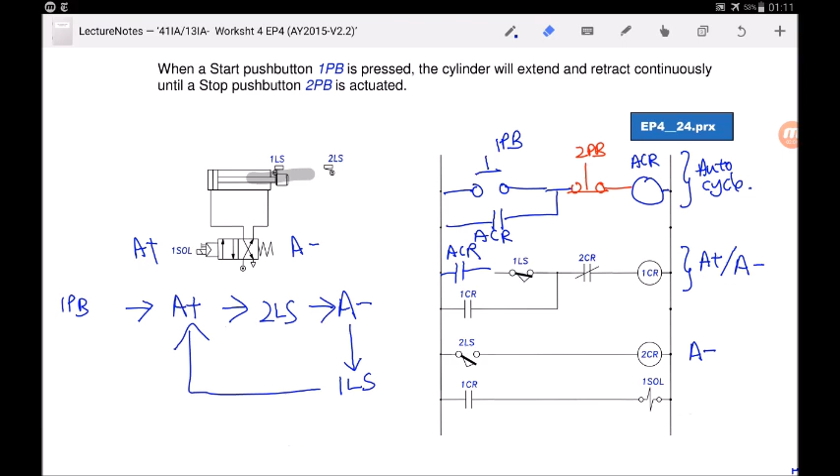I will replace the 1PB I drew previously with an ACR contact. So, story cut short, when I press 1PB, ACR coil turns on, the contact closes, and ACR coil remains energized forever, so the ACR contact here will be forever closed. So when your cylinder is at fully retracted position, 1CR will turn on, solenoid will be activated, so the cylinder will extend. Once it reaches fully extended position, it will open the circuit - this becomes normally closed held open because it reaches 2LS, and 2CR will be energized.

Okay, so you break the circuit, 1CR will be off, the cylinder will retract. When 1CR coil is off, this one goes back to normally open position and solenoid is off. That's why cylinder retracts. When the cylinder is fully retracted, 1LS will become normally open held closed again, and because ACR is already on right at the start, and it stays on forever because of the latch here, your cylinder will then extend again, and this whole cycle will keep repeating until you press 2 PB, ACR will be off. So when ACR is off, it becomes normally open, and the whole thing will stop at the end of cycle.

Now we shall take a look at the simulation circuit to understand this circuit better.